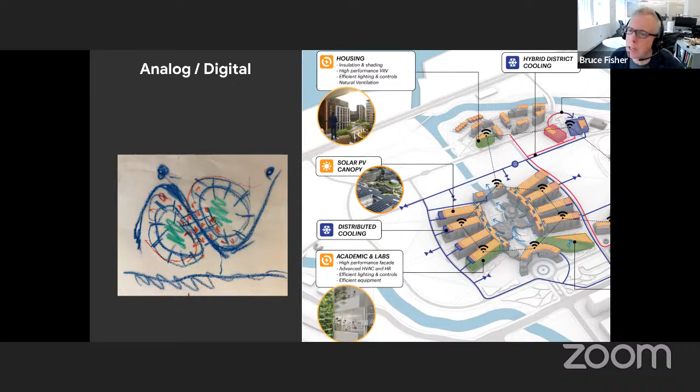Today we're in a period where we've looked at the degree to which AI, the degree to which our analytical tools, can drive design. We've come to this point where we really believe in the analog, the intuition, what we know through a deep bench of knowledge, what we learn day to day walking around cities. There are initial, intuitive responses that we trust. But the question is how do we take those and build off them, and really build intelligence into those start points that are very good ideas?

We work around the world, as was mentioned, but the important thing is that we really do learn. We believe our 700-person firm is important, stationed in New York, London, Shanghai for instance, because we're always learning from the projects we do. We work on very diverse projects in diverse neighborhoods and cities, but the knowledge learned in one place we can really infuse into how we might innovate in another.

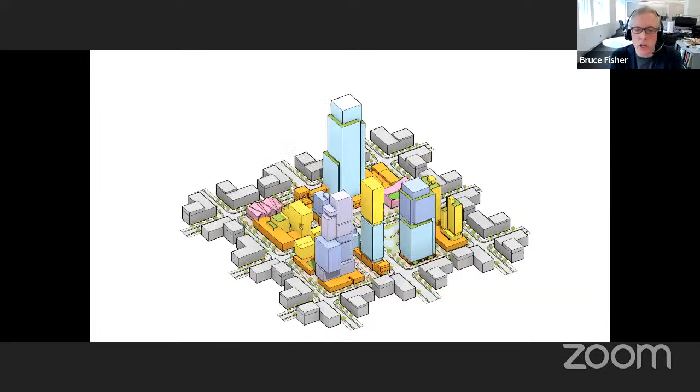Of course, we're architects, so we have a great understanding of typologies, a super broad understanding, whether it's education, culture, retail and leisure environments, or innovating the office, housing, hotels, transport. I'm not listing everything here, but we're very involved in all these types of architecture, and we know the latest trends because we're doing so much work. All of this fuses together in terms of our urbanism. It really informs how we believe we can shape blocks, shape streets, because it's about space, but also about how typologies and programs can fit, fuse together and synthesize to make vital places.

Our office, in terms of technology, has three pieces beyond just the architecture. We're very involved in growing our urban planning and the theory behind that, but also our environmental performance team is very involved with how buildings and cities perform, and our urban interface team deals with many of the tools that help us measure buildings.

So today I'm going to quickly go through three neighborhoods, and they're very different, from around the world. We'll start with Covent Garden, which is obviously in the UK.

We'll look at a North American site and an Asian site. These are all very, very different, and I just want to show the diversity of what we do and how we think about it.

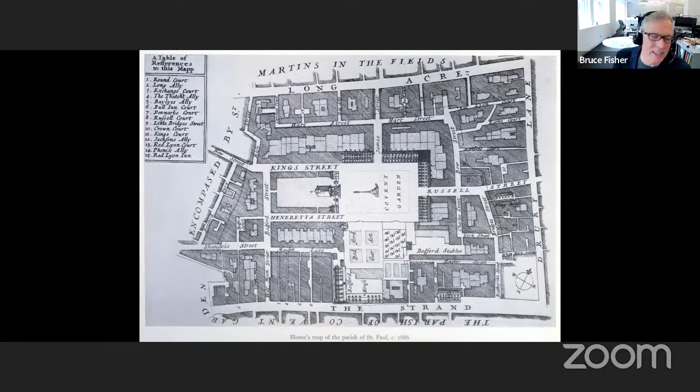Covent Garden is a 400-year-old, very ancient, famous piece of London. There's many stories to tell about it, but by the 1990s, this had become a place that was really about tourism. It wasn't a place that Londoners really would go to. I think many places around the world, whether it's Venice or others, become kind of museums, but they're not mixed-use neighborhoods that are really vital, still serving the city in many ways. So becoming a tourist destination, Londoners tended to avoid it.

But of course, there's a beautiful fabric here, this ancient piece of London. So the challenge for us, what we were asked to look at, was to analyze it and figure out how we could infuse more programs into it and also change patterns of movement.

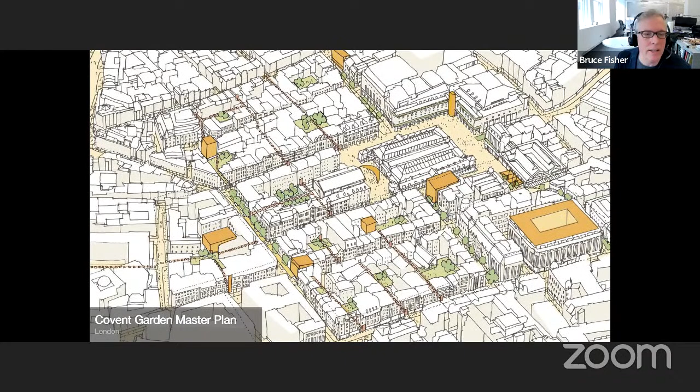The existing site plan had a lot of east-west movement, which happened to be along more of a tourist circuit, but the north and south neighborhoods weren't connected to these more London neighborhoods. The boxes were initial ideas, intuitive responses of where and how we might build in some surgically placed new program, and how we could infuse a porosity into the site and bring much more north-south connection.

So we analyzed this. We looked at one site in particular, Floral Court, which seemed very possible from the developer's point of view as a test case.

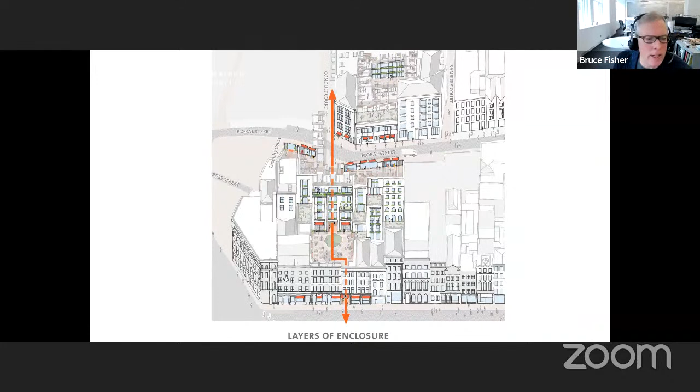We took the internal guts of the block, which were built out with miscellaneous structures built over time. We hollowed that out and actually built new alley connections through existing buildings into that space. This shows the kind of courtyard—Covent Garden is made up of courtyards—so we were taking the existing fabric and building more intimate spaces within it.

This shows the built-out scenario where we did build these alleys and hollowed out the interior of the block. Within that, we were able to build new housing—very valuable housing for Londoners—that would infuse a kind of 24-hour life and a place where Londoners would want to live, as well as new retail and F&B opportunities hidden in a cloistered, discovered space. This shows one example of new housing that fits right within the fabric of the city. We were also fascinated, working in Covent Garden specifically, with the scale of this space and how intimate it was, how good it made one feel.

Of course, we can measure street widths and building heights, and that's certainly an important measure for how we understand space. But we were also interested in figuring out how we might measure space another way—how the degree of openness and closed qualities of alleys and streets could be measured as a kind of wavelength. This was the kind of experimentation our UI group does.

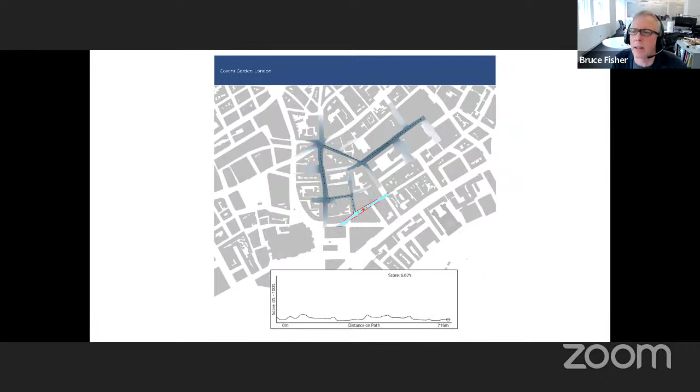You can see here that you get peaks and valleys—more open at the peaks, more closed at the valleys. This gave a kind of rhythm, a heartbeat that's arrhythmic, but has a certain level of highs and lows within that path.

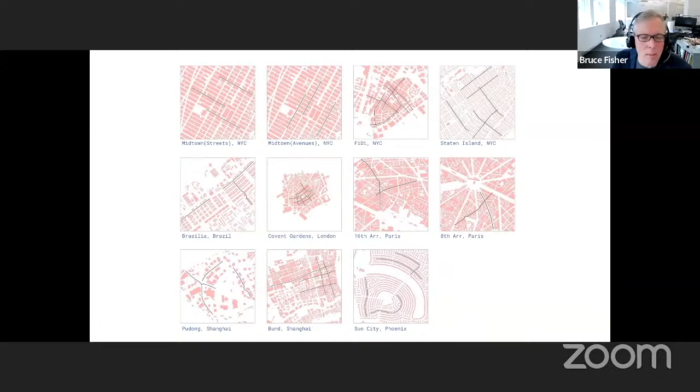We took that same knowledge, knowing how much we love London and Covent Garden and the intimacy of these streets, and applied that same tool to measure Midtown streets, Brasilia—neighborhoods within it—Covent Garden, pieces of Paris, and Sun City, Arizona. That allowed us to come up with this series of wavelengths.

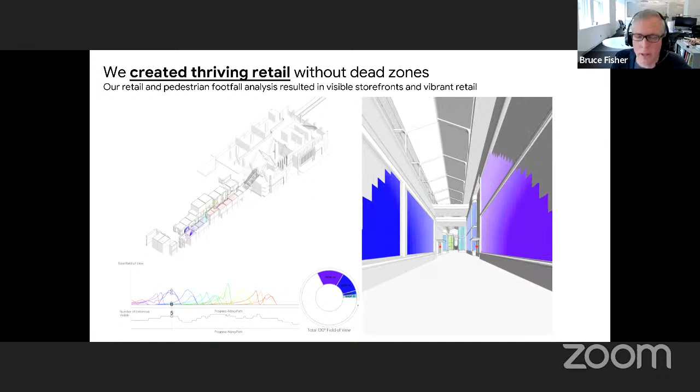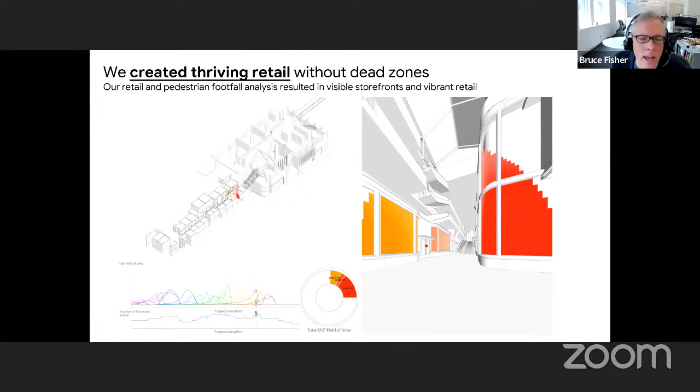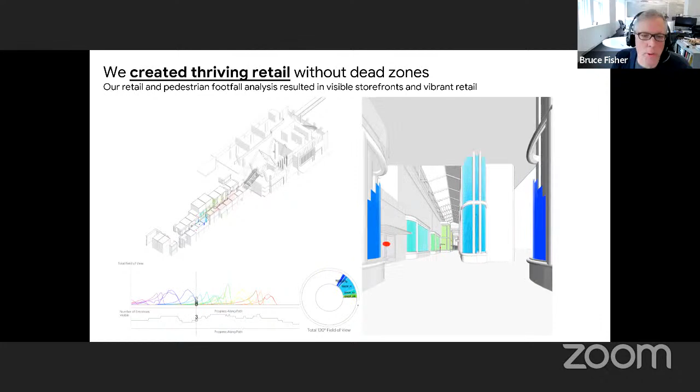So we use this tool to measure other things. For example, looking at a retail mall, another typology in Bangkok, we used the scale of the wave, the understanding of the distances between peaks and valleys, to help us design an equally evocative, perhaps more evocative, method of walking through this mall. What do you see? How many crenellations do you have? What are the larger spaces? What are the smaller spaces? That was an application of taking what we learned from Covent Garden, using digital tools to analyze it and apply it to other places.

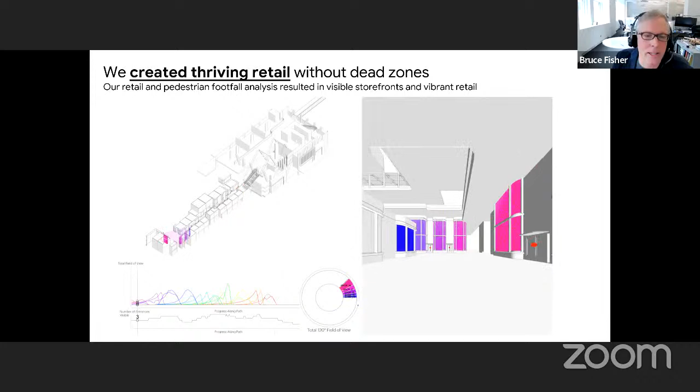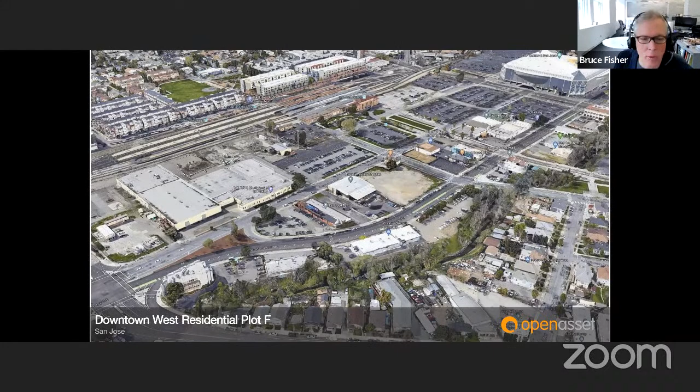Another project is Downtown West. We bring this out, pardon the OpenAsset, these are just things I downloaded from our intranet. But the important thing about this site is, like so many North American sites, it's on the fringe, and it's a place where there's redevelopment and a desire to make this a much more dense, mixed use place with an identity that, from a placemaking point of view, really becomes something strong and more like a downtown.

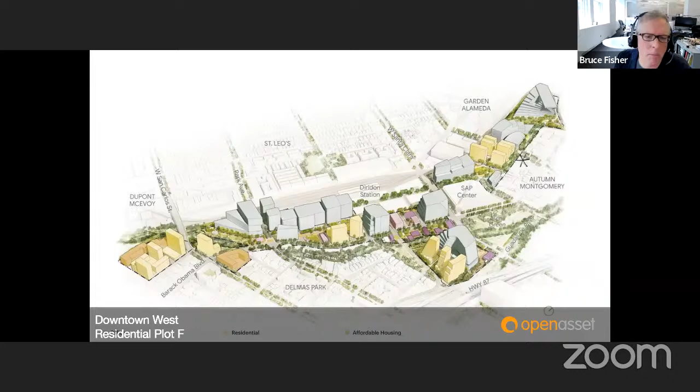We did not do the original site plan for this. Sitelab was responsible for this, but what we received was a layout of how buildings might lay out on blocks, the basic idea of a green belt running through this—all very important initial decisions.

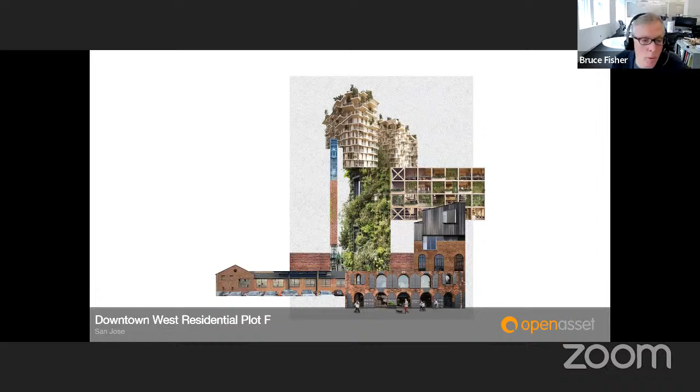But in terms of the look and feel of the place and how we were inspired—again, intuition—going to the site, the inspiration was some of the existing vestiges from the past, the industrial qualities of the site. That led us to, before we even started any design work per se, look at what the feeling would be that we'd want on this site, with high rise, low rise, the old and the new, multiple programs of retail, work, and living.

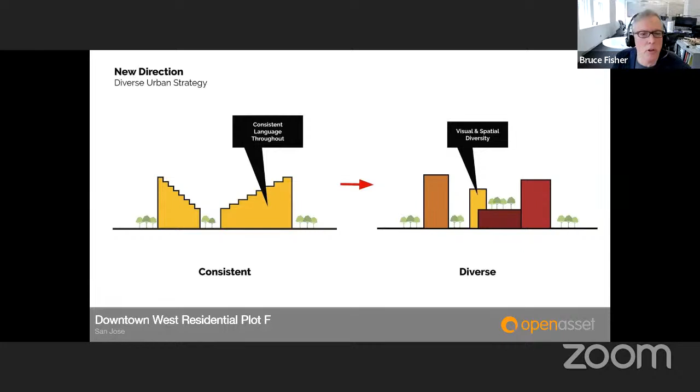We also looked at how blocks might be thought of—some being more consistent, some being more diverse. And then, with those initial ideas, we took to looking at individual sites.

This is a residential site, and we tried to really measure—this is true for all the blocks—what would be some of the best configurations if we wanted something more stratified vertically. What we're looking at here is combining a parking grid, a reasonable residential grid, views, sunlight, thermal comfort. All of that is integrated to help us form the ultimate envelopes we're recommending for these various sites.

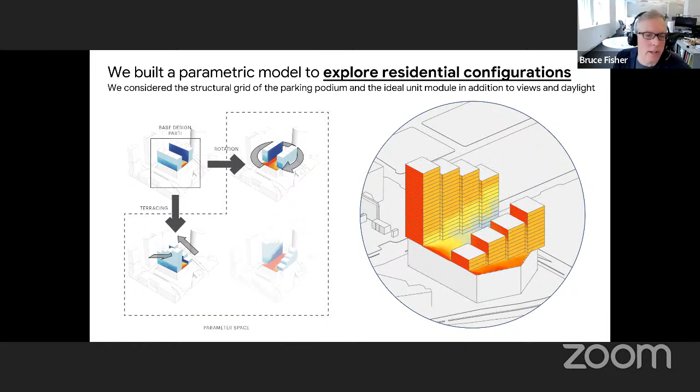Another way we use data on a site like this is looking around the existing neighborhoods, through Google Places and other means, and GIS—Google Places is particularly interesting for understanding what already exists within the site, where we can infuse different kinds of programs, and how we avoid cannibalizing adjacent neighborhoods while building in these new programs.

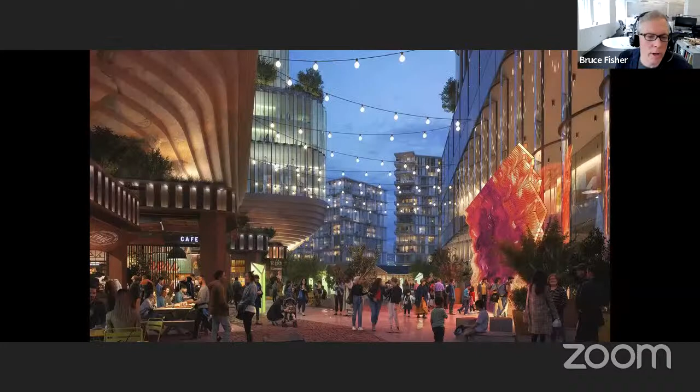All of this leads to a vision and image of the place. In this case, we're looking at a retail street. We've generally got the idea of orientation and shapes of buildings, and we know how views work. This allows us to imagine, since it's not all built out, how this place might look—the more intimate spaces, the wider open spaces, where high and low might work best, and also where nature might be most innovatively woven into this city.

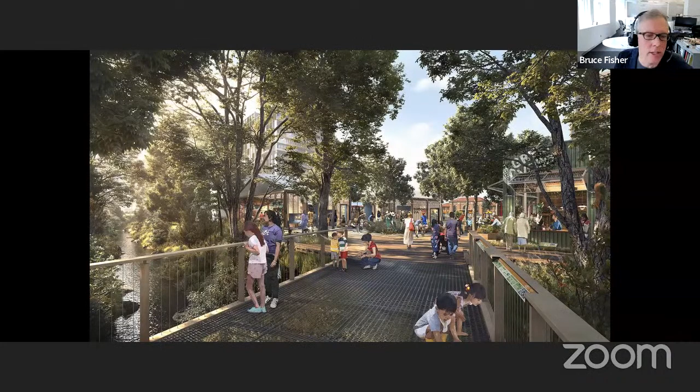Now, the issue with projects like this—what I really want to talk about—is you have a master plan with a 20-year lifespan. You're going to have hundreds of consultants, dozens of architects in this case, coming in to actually design the buildings. How do we retain and measure what's happening over time? How does the client know what one building looks like relative to another? How do we synthesize all this information?

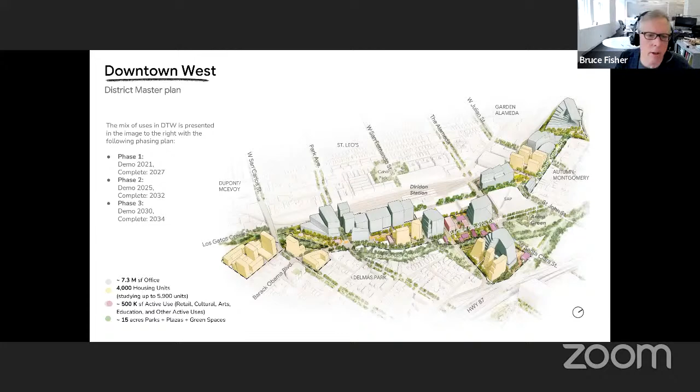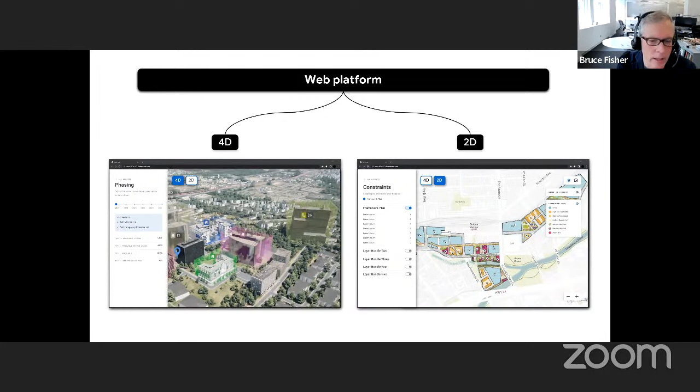What KPF has been hired to do is actually be the precinct architect, where we are digital stewards making sure that all the data from various architects, all the zoning ideas, the key ideas about materiality—all of that lives in one place.

What we have is essentially a series of data sets that understand the overall development relationships between projects. They track areas and phasing. They allow us instant walkthroughs—because it's all in 3D using BIM and 360 assets, this allows us to do walkthroughs and fly-throughs based on the current project design, and visualize consolidated sets of data that enable faster onboarding for other consultants.

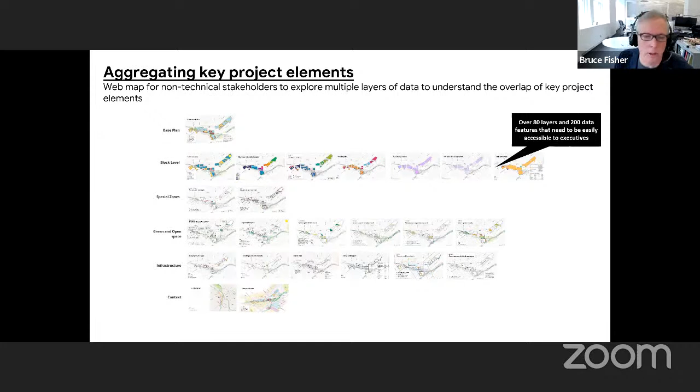This is kind of back-of-house work, but it's so fundamental, we feel, going forward for how cities and these master plans can actually evolve from the original image one wants, the look and feel, the placemaking qualities, and how we make sure that gets built into the development over time.

The other part of this is getting the community to buy into density in these various places. There are NIMBYs everywhere, a general intuitive response that development is bad, density is bad. What this platform has allowed us to do is, in a public setting and online, really show people what density might mean.

If you dial it way up, maybe there's more shadow, some negative effects. If you say a middle zone with density, actually there's much more tax that comes to the city, which allows all these parks, and we get much more affordable housing.

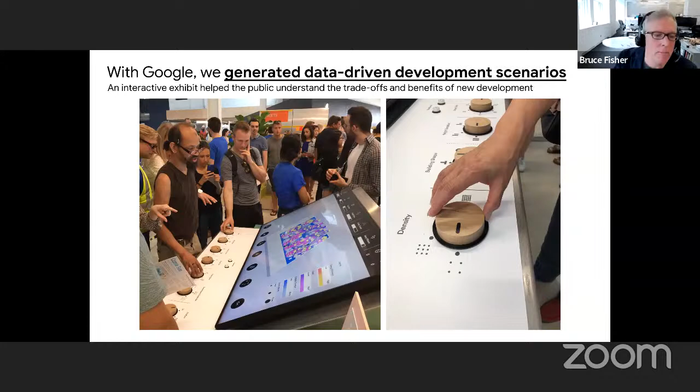So we're trying to show people visually, through their own ability to dial up and dial down different issues, to visualize what the city might be and how this really does impact them. This has been very effective for the Hawaiian Housing Authority and other places where we're working, because it's online, it's something people can really play with and look at trends — if there's more density, if there's less density — and understand what that means.

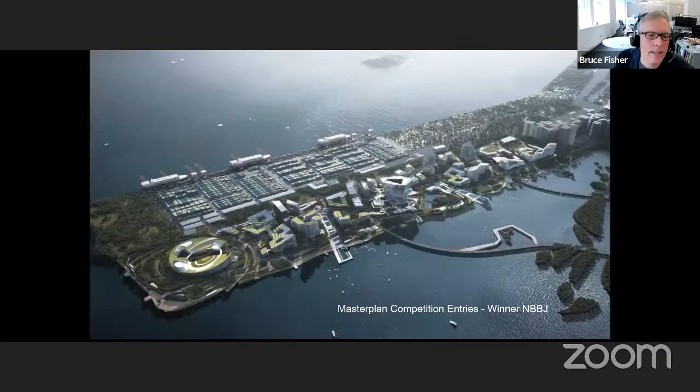The last project I'll go through is one we worked on in Shenzhen. It's more of an internet city. The master plan winner was NBBJ, and what we were given was one site to study within this master plan.

What was given was the block area, the neighborhood area, the water edges, main streets, and also this idea of a commons line that was going to thread together all of the various sites. Our start point is always still these kind of sketch ideas, before we analyze the site relative to climate and things like that.

Initial ideas still grow out of our intuitive responses — how we might intelligently bring in various uses, how we might intelligently connect water to the deep part of the site. In this funny little first sketch, you can see how we might bring nature into the center of the site. The water views were excellent, but the interior was actually a kind of harsh environment, so our start point was: how might we bring the most green to the most people?

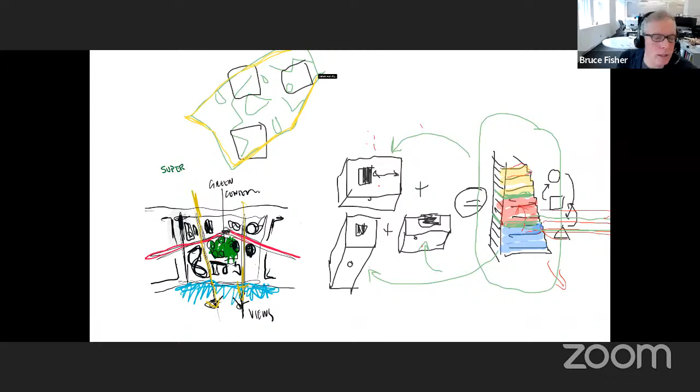That led to diagrams — a kind of traditional planning process we all go through — parti diagrams and other concepts, such as how energy might be absorbed in these taller buildings in a very hot climate, how we might shade in an incredibly humid climate, how we might have a zone of comfort and a zone of resilience. These grow out of our collective knowledge of what might make sense, but it's still a concept.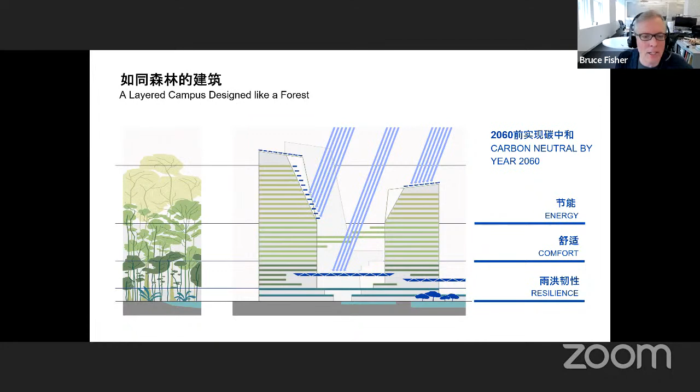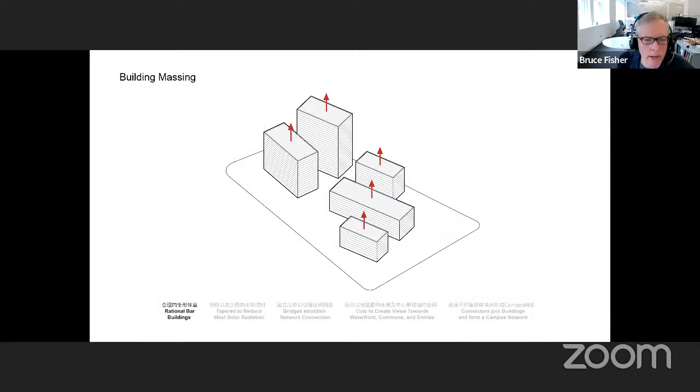Now it comes to testing. We lay out these forms, we have start points, and then we really look at the climate issues, the views, where connections want to occur, how wind is flowing through the site. We're shaping and molding these forms to work with those various forces, leading to a clear overall site plan idea.

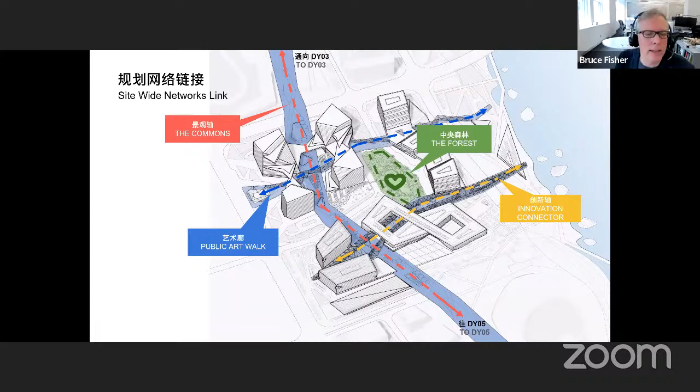We also look at wind and porosity, testing in multiple iterations how we can better deal with solar radiation — how do we absorb the most sunlight for solar energy, but also keep the light out of the interior? These iterative, parametric design explorations allow us to relatively quickly come up with optimal solutions.

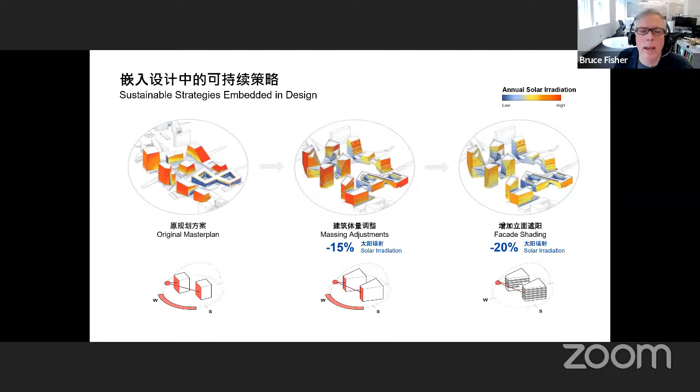Whether dealing with sun to reduce the carbon footprint, or running experiential analysis to understand covered walkways and getting people from one place to another, we look at how much sun is exposed within these places and how to make them more covered and thermally comfortable. This maps, through these dots, the hottest and coolest places, which allows us to hone where open panels are and where we might want more covering.

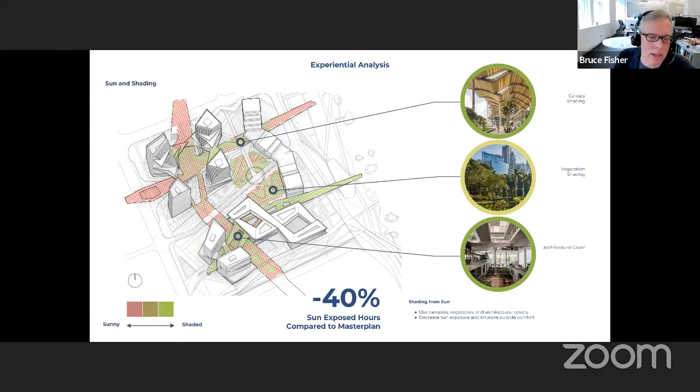This is a very specific exercise that allows great specificity in the ultimate design. It shows a vision based on that — how we build out those canopies to have the right balance of sunlight, wind, thermal comfort, and resilience, with even materiality embedded in here to synthesize the optimal solutions. We can also do this in terms of measuring green space and access to nature.

We have our green heart. What we were trying to do here was ensure that the maximum number of building facades have a view of the green as one is walking, whether going through this forest or not—visually connected to this green. We're trying to increase access to nature through an initial idea, then honing the architecture and urban form to make sure that works.

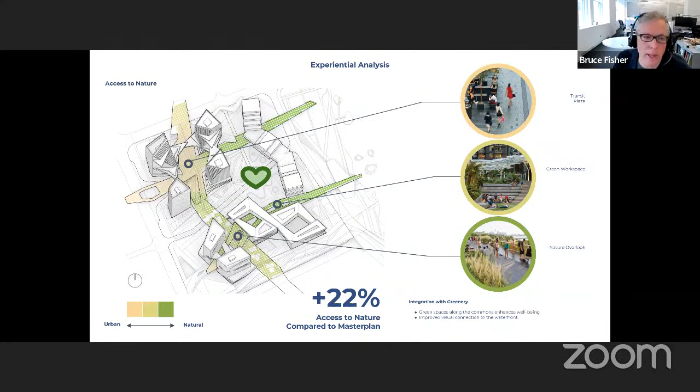This shows a synthesis of that idea—a very natural heart to the site that's involved with part of our resilience strategy, but also creates a nice counterpoint between architecture and nature from a placemaking point of view, and allows everyone to be aware of this special natural place within the overall project.

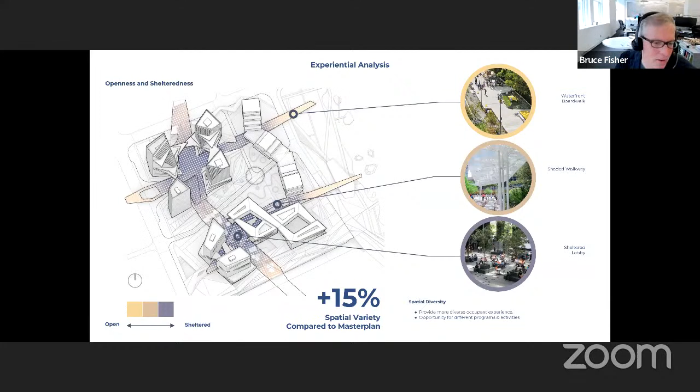In terms of spatial variety, going back to Covent Garden, we can measure and know that we want places of compression and places of expansion. This map shows transitions from spatially compressed areas to more open areas, and we want to enhance that spatial variety. When we see it's lacking, there's a monotony in that wavelength, so we know where to build more bumps or find various ways of shaping the landscape one experiences to make it more interesting.

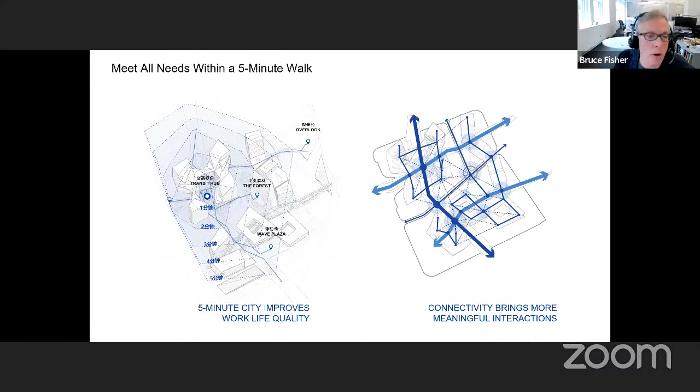And again, the whole idea of the 15 or 5-minute city. In this case we have a close enough neighborhood that we worked closely to make connections as efficient as possible between places, both at grade and in the air, while making sure those correspond with the areas where we want the most thermal comfort. This shows an image of those bridges and the connection of buildings.

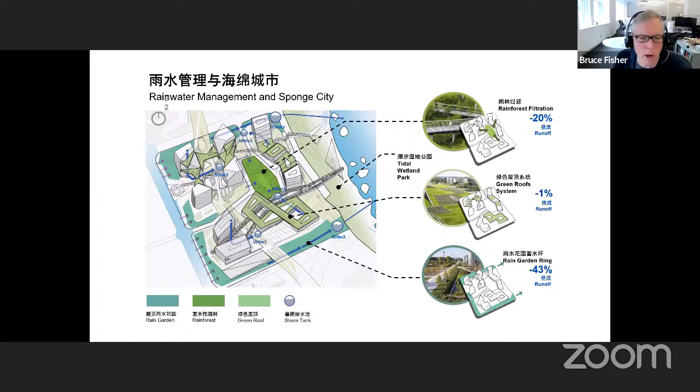Lastly, from a resilience point of view, we really measure the way this can work as a sponge city—through rainforest filtration, green roofs, rain gardens. We can measure all of that to quantify it clearly within our architecture firm. We're not engineers, but we can quantify and make sure our design, as we build through the process, is actually meeting these goals. These are some other images of that study and process.

So to end, that's really what I wanted to go through today—comparing and understanding how we're fusing sketchy, intuitive ideas with data. Looking at machine learning and pushing the limits of how much it can design for us, we still believe in the power of the mind, our collective thought, our intuitive, creative, idiosyncratic responses. We trust the intelligence of those, as long as we can measure them and make sure they fuse together for the best design ideas and solutions.

So that's it, Bruce, thank you so much. That was so refreshing. We have about 10 minutes for Q&A. I will ask a question after Sonia's questions, because I always say we're so low tech and everything is just so intuition based, as you said. But Sonia, please—and I invite the audience to type your question in the chat or Q&A. If I accidentally disabled the chat, I apologize, but there's Q&A. So Sonia, please kick things off with your questions.